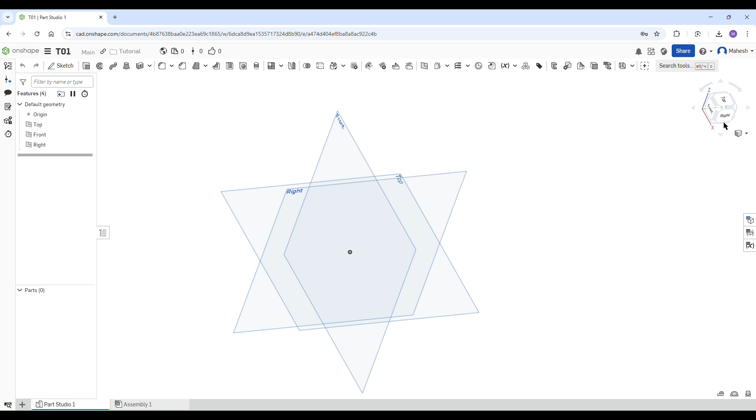As well as if you go here, you can see all the surfaces or all the sides of the cube. If you click on top, it will show your top plane. If you click on front, it will show your front plane. If you click on right, it will show the right plane.

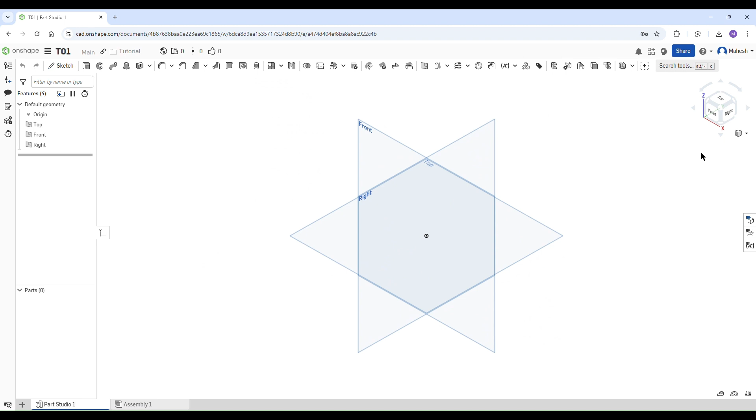Similarly, if you want to go to a particular view, say isometric, it will show isometric view, dimetric view, trimetric view, as well as section view is also here. This we will check when we make the 3D part.

So one thing to be noted - if you click here, this is not the isometric view. For isometric view, you need to go here and click here. This is the isometric view, this is not the isometric view.

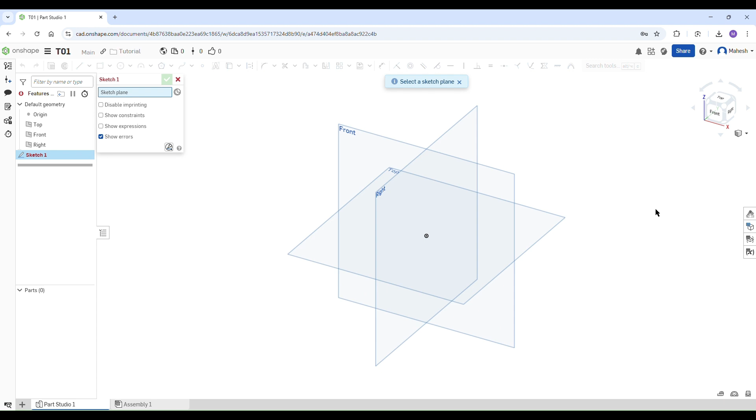So these are all the options to create the 3D part. First we need to make a sketch. So please click on sketch, select whatever plane you want - say top plane, right plane, front plane. Currently I'm thinking to use the top plane. So top plane, then click on - either you can click here or just press N.

Press N on your keyboard, so it will become normal to your screen. The drawing plane will become normal to your screen.

So मुझे एक solid cylinder बनाना है. So I will do circle. यहाँ पे origin पे रखने के अलावा I will make it somewhere here. I want it to be 120 mm. So हमने जो initially workspace unit बनाया set किए थे, so it will become useful in this case. So now if you see this particular geometry is free to move in this plane, sketch plane 1.

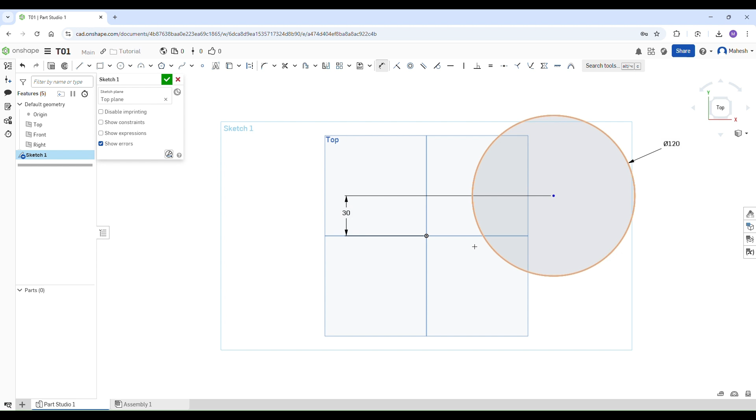तो हमें ये restrict करना है. So हमें इसको x and y coordinate देना पड़ेगा. To give the x and y coordinate, you can always use the origin point. So for example, go here, dimension, from here to here, I need 30. So 30 mm हो गया. And from here to here, I need 30 again. 30 mm. So now you can see the color got changed to the black.

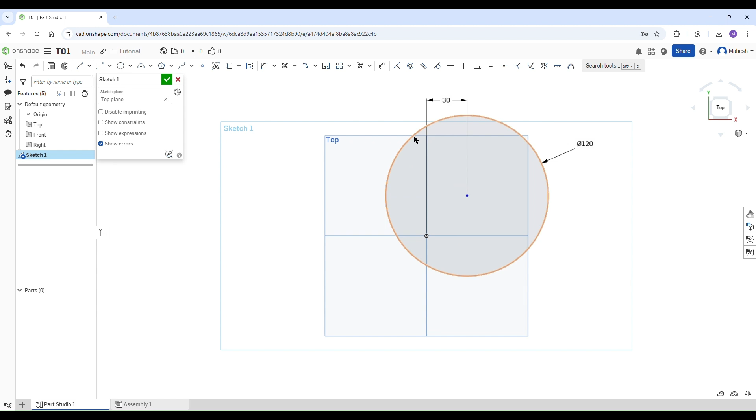Now your geometry is fully constrained. So but now I don't want it at the 30 and 30. So I will just delete this dimension. Again it went blue, so it can move like this anywhere because we have not put any y dimension to constrain the circle. So I will delete this also now.

I want to match this guy with this, basically center of the circle with the origin. So I can directly drag it and place it here, or there is option called as coincidence. So click here, click option on coincidence, click here and click here. It will become coincident. And by default origin के ऊपर overlap होने की वजह से it will get fully constrained.

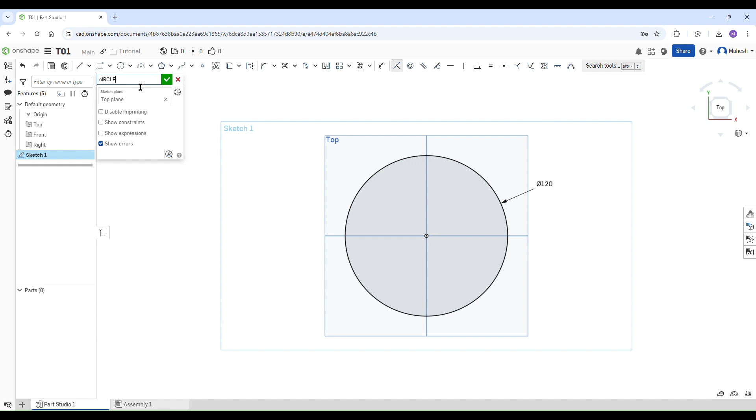So now to generate the 3D shape out of this 2D drawing, just hit a tick mark on the sketch one. Always you can rename this as a say circle one. For easy way, we can put a C01. Click here. So now I want to pocket it or pad it.

So go here, extrude, select the geometry here, select the geometry. It will give you a lot of options. Do you want to make a solid? Do you want to make a surface? Do you want to make it a thin? You want to create the new? You want to add to the existing material, or you want to remove it?

Basically, pad and pocket दोनों command Onshape में single window में आते हैं. So new or add is basically the pad, and remove is the pocket command. Then intersection is also here.

So do you want to make it blind, like some कुछ thickness आपको देना है limited, तो you can click on blind. और अगर आपके पास कुछ existing already geometry है तो up to next, up to face, this we will see later on. So I will just keep it as a blind. I will make the thickness as a 50.

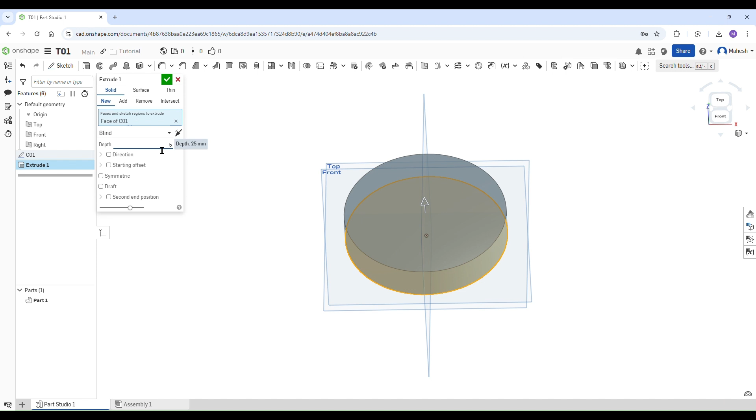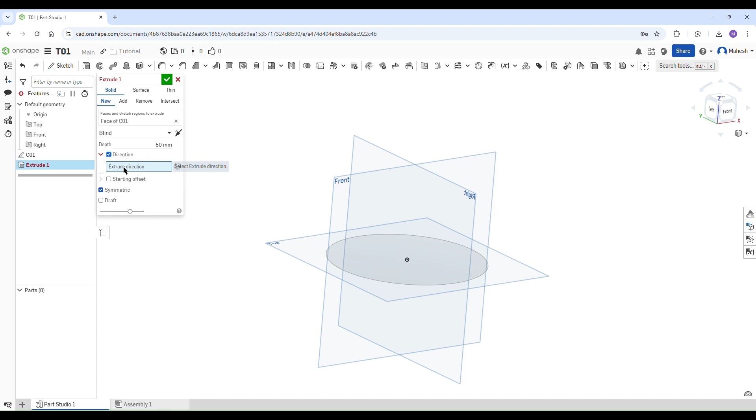So 50. Now there are multiple ways whether you want to keep full part on top of the top plane or just symmetry. Symmetry मतलब 25 mm above, 25 mm below your drawing plane. Then again, if you click on the direction, first direction में कितना चाहिए, second direction में कितना चाहिए, that also you can keep it. But currently I am selecting as symmetry for understanding purpose. Then just click on tick.

So here you can see you have created the first part in the Onshape. And again, go here, you can rename it as cylinder, cylinder solid.

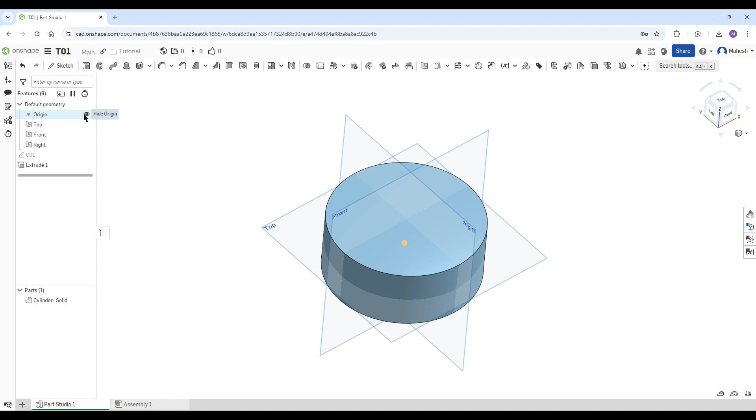So now here you can see I have a lot of planes here. I don't want them. So you can go here and hide each of them. और अगर आपको unhide ही रखने हैं, so just click on here. And shortcut key is just click on P. तो सारे जितने भी plane होंगे, they will get hidden.

So this is how you can create a solid part in the Onshape. Thank you.